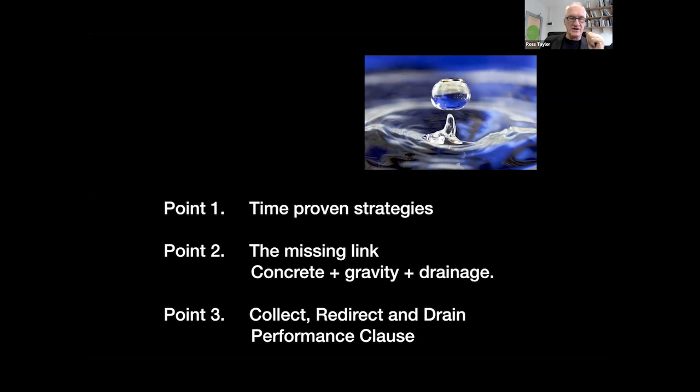So to begin with, time-proven strategies. We thought, how can you argue with the Romans and what they gave us? What did the Romans give us? Well, they gave us concrete, although there is some thought that in fact the Romans pinched it off the Greeks, who pinched it off the Turks, who pinched it off the Phoenicians. But we won't go there.

But I think we could all agree that, especially addressing a group of architects, we can start off with the Pantheon in Rome—we're on safe ground here. It remains the biggest unreinforced concrete dome in the world, 43 metres wide, with a lovely oculus at the top. And of course, this arrangement has been pinched by lots of people ever since, including our own War Memorial in Hyde Park in Sydney, and also the new War Memorial in Canberra, in terms of the oculus, not in terms of diameter.

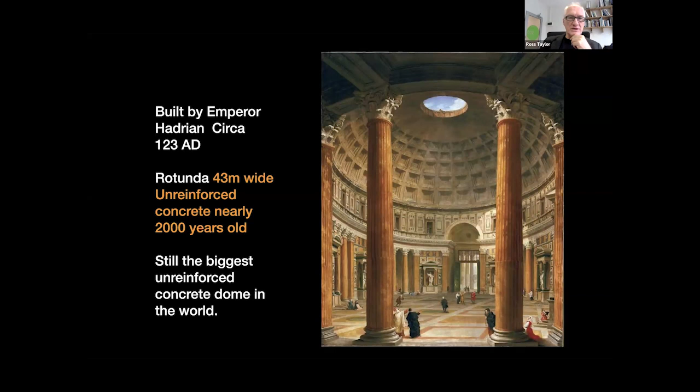This is nearly 2,000 years old. It's holding up well. Unless a developer gets permission to redevelop it, it should last another 2,000 years.

Of course, it's based on writings that Vitruvius was—of course you architects are all familiar with this, you've studied it endlessly. But we're going to have a slightly different spin on how Vitruvius has influenced the BCA changes. He, of course, is pointing in this diagram across to a Greek temple—he pinched the ideas off Greece and said, here's some good ideas, let's put it in a book. And that's all we're doing here, is saying, here's some good ideas from Vitruvius, let's put it in the book.

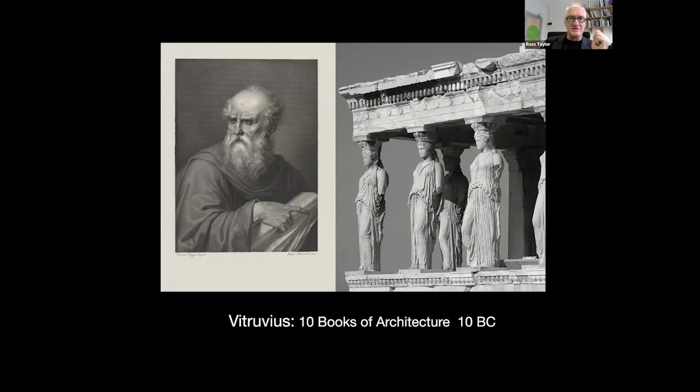So for those of you that maybe it's been a few years since you went to university, you'll know that chapter one is about floors, and it starts with concrete flooring. For those less familiar with the book, down in the bottom right-hand corner... do I show? No, I haven't got a buzzer. Is there a highlighter?

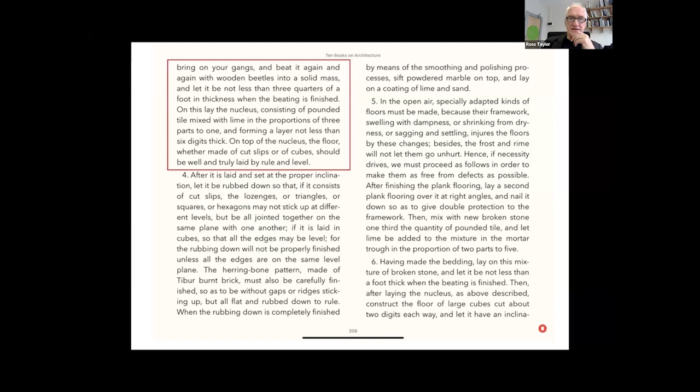But what he basically says is that when you're laying a floor, you'll cut falls 2 digits each way and let it have an inclination of 2 digits for every 10 feet. You can see in the top left-hand corner, which roughly equates to 1 in 80—it's actually 1 in 79, and we pinched that.

We thought we wouldn't use 1 in 79 for the NCC, we will use 1 in 80. He then goes on in number 7 there as to how to put a membrane on the top of that.

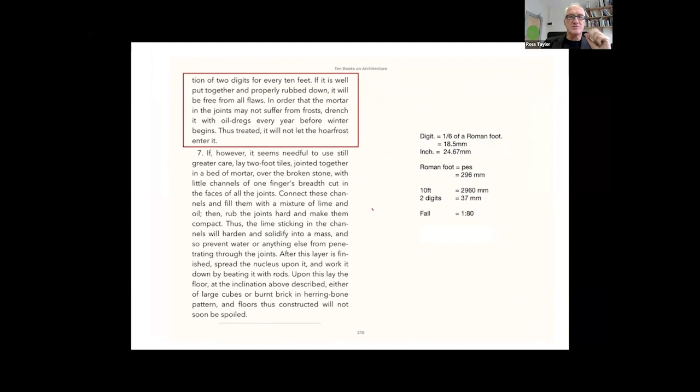So it's all about getting the falls below the membrane, not on top of it, which is so commonly the case. And of course, like many of you, you would have heard a builder say, no, I can't get 1 in 80 falls, it's too hard. We just highlight that the Romans were able to get 1 in 3,000 falls for the aqueducts.

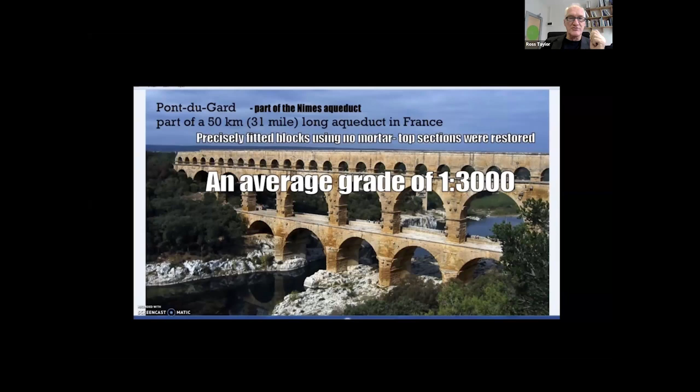So for every structural engineer that says, no, we can't draw sloping lines, we can only draw straight lines, we say, yes, well, this was done by hand, but we need to bring that back to the industry.

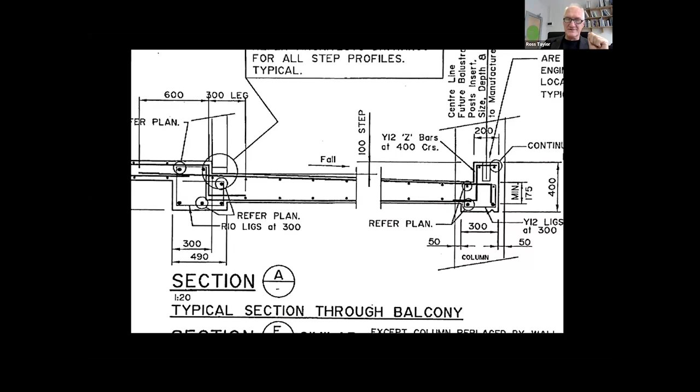What we're trying to really emphasize is the two things that have worked well in managing water on the outside of the building. One is a brick veneer wall, which first emerged in the 1930s. It's been a very successful system based on drainage system thinking rather than perfect barrier thinking, which is just putting a plastic bag on the outside of the building. Many of you will be familiar with the terrible problems they had in Canada and New Zealand, which came from trapping moisture inside the structure rather than allowing the water in, capturing it, redirecting it, and draining it. So a screen, a cavity, a drainage plane works well in the vertical.

The fundamental concept here is, it works so well in high rise. Where has it gone wrong that we have so many flat bits that don't work? The physics of water and gravity have been understood for millennia, but that understanding was lost for the flat bits. In my remedial work, we constantly come back to major university buildings—not just blocks of flats in the outer western suburbs—where the verticals are okay, but all the flat bits, the podiums, the balconies, and the basements leak. So the facade drain system thinking has worked exceptionally well across the industry.

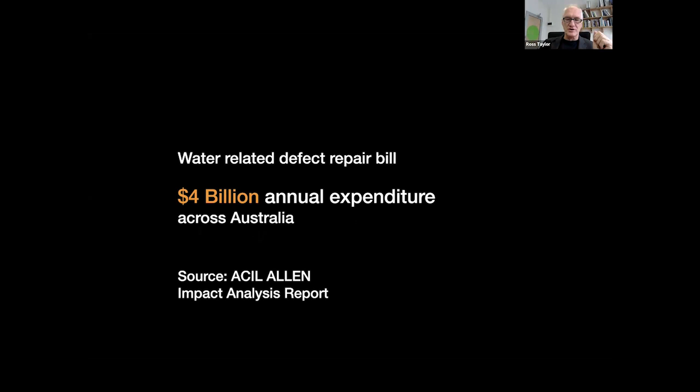Now, some would say that's how much was spent on lawyers, but I don't think that's true. It's also spent on an awful lot of jackhammering up of tiles and pavements across Australia. But one of the things from my experience in 30 or 40 years in this is that 90% of these leaks are from what we could call subsurface water—water that seeps into the substrate, does its little tricks, runs along, and comes out somewhere further along. That's subsurface water, as opposed to water that just runs along in view on the top of the surface.

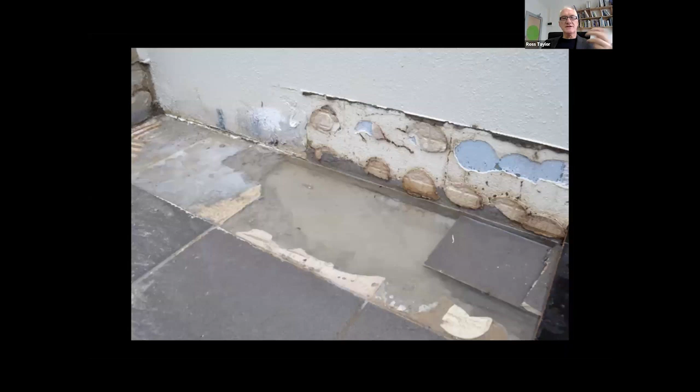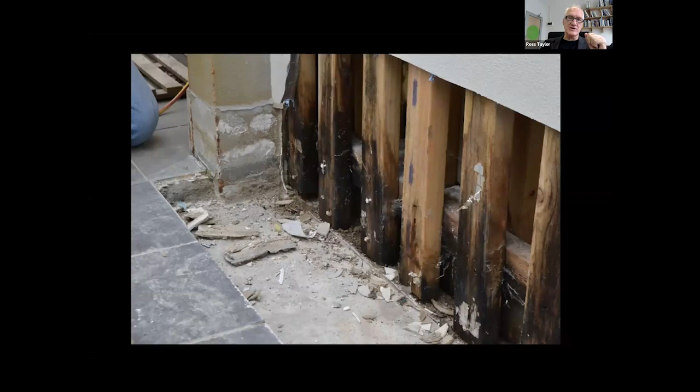This is where we see the pain occurring in so many units. The water that seeps into the structure can't get out, and drains in instead of draining away. This is the familiar pattern—blue board on the right-hand side there.

Michael, do we have a highlighter we could use? I wonder—there's the device. Anyway, maybe we can't, I don't know if I can. Ruth, can we do that, do you think? I can't see that on the screen. But I don't have anything on my screen.

With the blue, we've got water coming in through the blue board because it can't get out. Blue board's supposed to be a drainage system, but so often we block it. And then we have a flat slab with the membrane turning up to the outlet, and that's because of the disassociation in our industry between the shape of the concrete, where the membrane's placed, and the final finishes on the balcony.

So we go from this situation, which works, where the water drains clearly and freely to the outlet, to the previous situation where it's all jammed, and we basically have a permanent swimming pool holding the water. Now, it's not just cheap and nasty suburban building—the same concept has caused leaks at the Sydney Opera House forecourt for the last 30 years. The main building, of course, has good falls on it, so that doesn't have a problem. But all the flat bits have caused this.

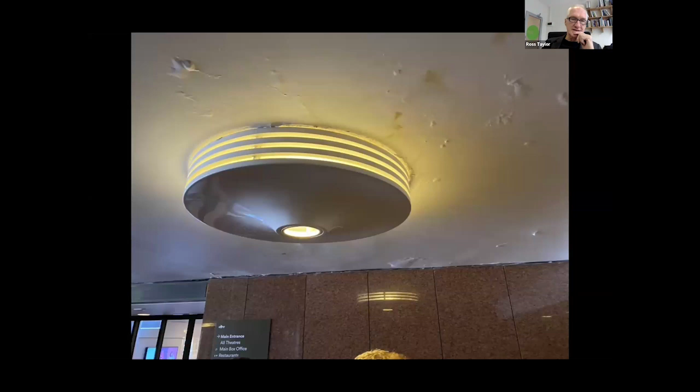So many of you that have spent a few hours down at the bar here would have recognised this in the ceiling. And of course, it's been repaired twice with the same old paradigm: let's hold the water forever because we've got a 20-year warranty on the membrane, we'll be okay—the thin black line, as we call it. But in fact, in this whole forecourt area, when we did the forensic analysis of the cause, we found the only drainage for that entire area is that linear drain on the left-hand side there. Any water getting down through the pavement underneath can't get out.

So it has to be stored by the membrane forever.

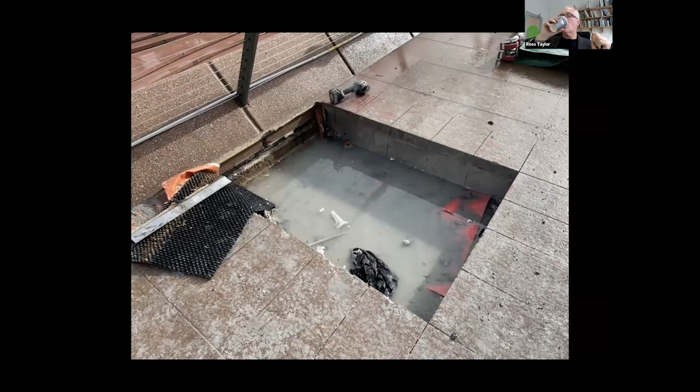And that's what gives rise to this: stored water down through multiple layers, and it's got plenty of time to cause mischief. That's when we have gravity working against us rather than for us.

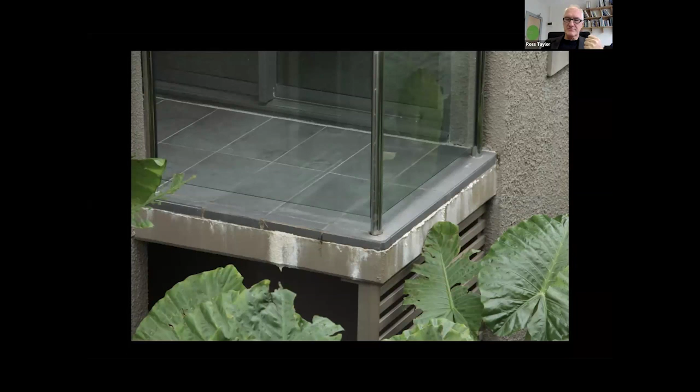And of course, every highway we go down, we see efflorescence where subsurface water is draining through, leaching minerals and causing damage.

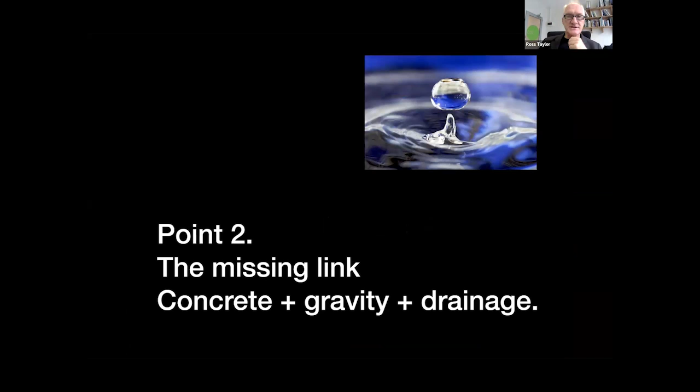So as part of the team, the Watershedding Community of Practice team, of which Craig and Michael are members, we had a look at the analysis of why it happens. And this is where we found this missing link: concrete, gravity, and drainage.

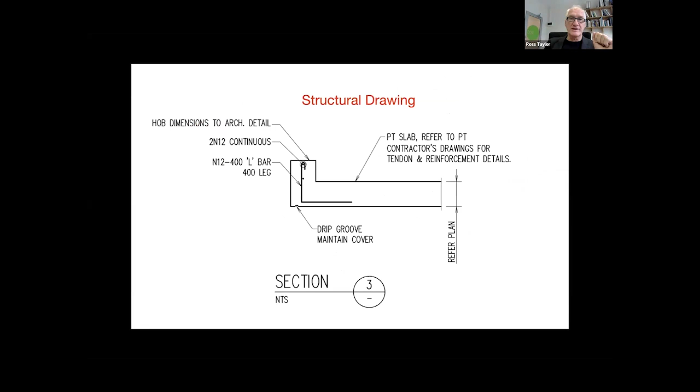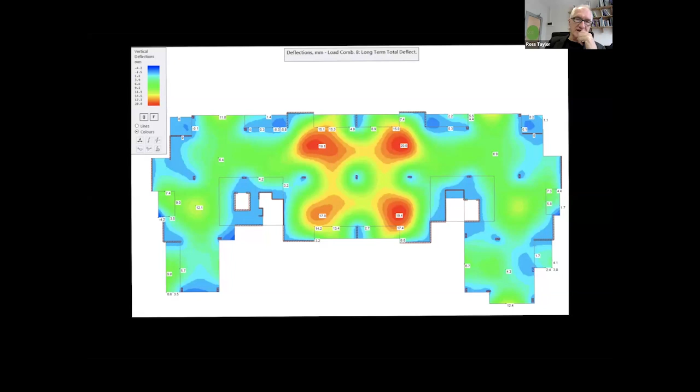Then, of course, as Michael's going to show in a few minutes, in 10 years' time, you then have hogging and sagging of the balcony. And what we commonly find when we come back to these buildings is that the outlets are often at the highest point of the roof, because the downpipes have been put in a column and it's been deflected away from the column.

What it really says - and this is not just the people in this room, it's right across the industry - is: look, I know waterproofing is a point of litigation, there's a lot of leaks, surely it's somebody else's problem, I'll just put it on the drawing, it's somebody else's problem, I won't actually try and integrate it into my design.

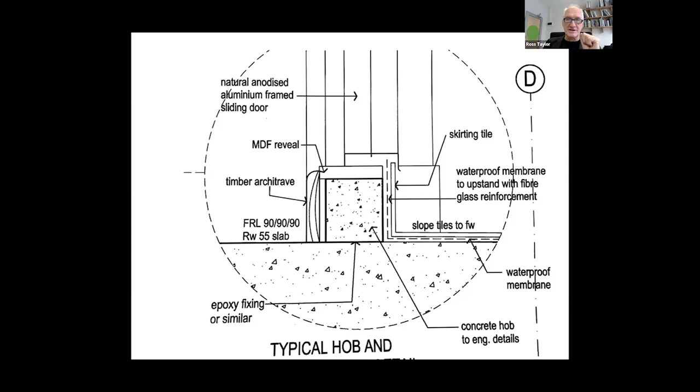So now it's slope tiles to floor waste, and that's what we end up with. That's the actual drawing for this roof. In other words, the water can't get away.

And even worse, the outlets, downpipes and branches are an afterthought. This is quite a famous and substantial plaza in the city, and the branch lines were poured on top of the concrete, which was flat and stored water. Or even this beautiful photo from Nat Press of an inspection by the Commission, where downpipes, when they're put in and thought about last, have to work in around the rest of the structure.

So this is what we end up with commonly across the industry. I have seen thousands of balconies that end up with this type of situation. It may look like a cartoon, but unfortunately it's painfully real. I've seen balconies two years old with 140 millimeters of sagging deflection.

PT cracking, pulling the guts out of the slab. Separate hob on the outside where water leaches through, water running away from the outlet, and the thin black line - or the red line in this case - of membrane turning up, and everybody hoping that their 20-year warranty they invested in is going to do the job. A flat slab right through, and water leaking in under the sliding door. That just happens commonly throughout Australia.

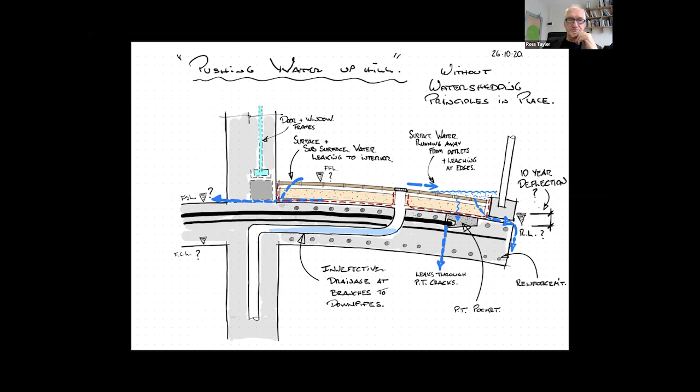One of the other reasons why this happens is that the BCA between 1988 and 2022 got its first changes, many from the Watershedding Community of Practice, the first tranche of changes. But between '88 and '22, there was almost no change. Part F1, in the 2022 version, actually only referred to surface water management, rising damp and external waterproofing.

In the section on external waterproofing, because surface water refers to water landing on the site, when we looked at the definition of site and surface water, we found that site is not the actual building. So the whole of Part F1 doesn't cover any of the building above ground. Then it had an exclusion for Class 7 buildings like car parks below ground. So in many Class 2 buildings with car parks down below, this section of the BCA didn't cover any of the building above the ground and none of the building below ground. We thought this wasn't helpful because the leaks are not happening at ground level.

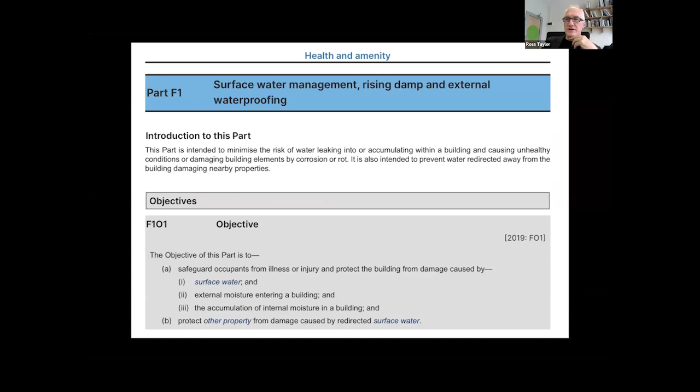So we came up with the crazy notion of calling water, water. Instead of just surface water resulting from storm... what we've done is redefine water as including surface water, subsurface water, rainwater, stormwater, rising damp - it's just now called water. So we don't have that exclusion problem.

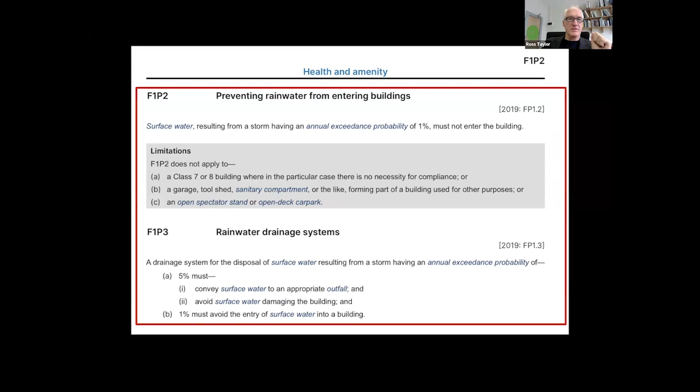Now, similarly, we had the problem previously that roof and wall cladding said it wants to stop water entering the building. Down here in the objective, you can see: safeguard occupants from damage caused by ingress of water from outside the building. And in fact, the old performance clause said a roof and external wall must prevent the penetration of water.

That's completely counter to the idea of drain system thinking, which is to allow the water in through the element, the bulk of it being deflected off the face, but some will come in because it's too hard to keep it all out in one go. But when it comes in, we then collect it and redirect it out of danger. So the performance clause here is the very opposite of what has worked best in the building industry - drain system thinking for facades, cavity walls, and pavers on support pads, which Mirvac have been using for 30 years successfully.

Technically, because the building is defined as the outer element, you might not know it, but cavity brick wall or brick veneer wall has been non-compliant to the BCA for the last 30 or 40 years. And you should have had a performance clause for the use of it. You might be interested to know.

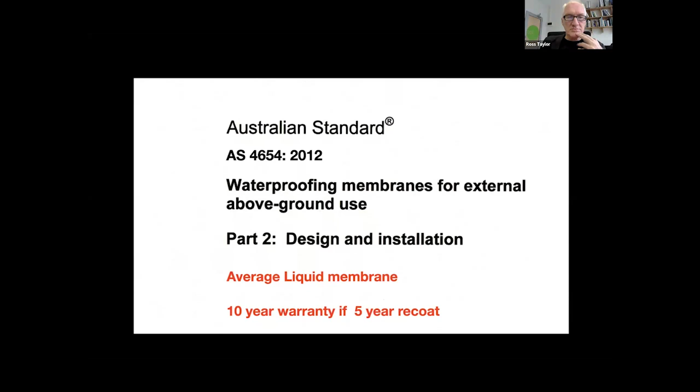At the moment, it refers to - and Craig's going to go over this in more detail in terms of the deemed to satisfy clauses - but what it makes reference across to is the use of membranes, which is the only reference to how to manage water, except for stormwater. But the average liquid membrane, if you get a 10-year warranty, you've got to recoat it every 5 years. And yet, as Michael's going to explain in a moment, in AS 3600, concrete structures have got to have a design life of 50 years, with 100 years for monumental structures.

So that's the huge anomaly in our industry. We put a 5-year membrane down on concrete that's supposed to have a design life of 50 years, and as the Romans have shown us, concrete can last 2,000 years. That's the huge disconnect. So now we need to bring back the connection of using the shape of the concrete in the horizontal or flat bits to behave more like drain system thinking.

And that gets us to point 3. The fundamental watershedding performance clause we've introduced is that of collecting, redirecting, and draining water as a way of overcoming the problems. So now F1, P1 - there's been a merger of 2 sections. We aren't touching the wet areas at the moment, that's for another day. It's now referred to as managing water impact on the building and adjoining properties.

So this clause on surface water is taken out and replaced instead with: water collected or concentrated by a building, associated site work or the allotment must be redirected to a drain system to prevent bad things. Water must be collected, redirected, and drained. And here we have the definition - water includes all of those things, so there's no arguing.

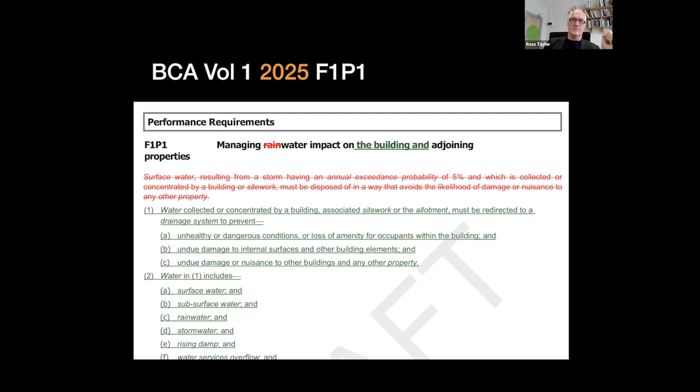Now, I can't tell you how much battle we had to actually get across the idea of calling water, water.

One key point I want to emphasize is the changes proposed here are just the beginning of shifting the way of looking at the whole issue of waterproofing and moving to a concept of watershedding, where there's integration of all the elements impacted by water into an integrated design that manages the water flow.

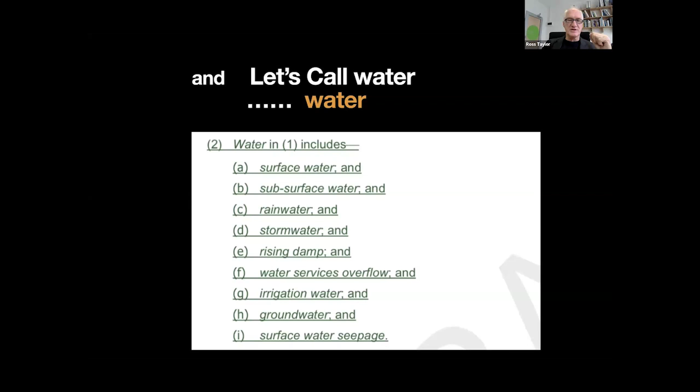Rather than stopping it, or just having a membrane with a 20-year warranty as the protection. That is where you guys come in. Architects are being put forward to be the coordinator of these things. They don't have to be the expert in each aspect, but their designs are to incorporate all of these elements, not least of which is how the structure behaves. And Michael will go into more detail.

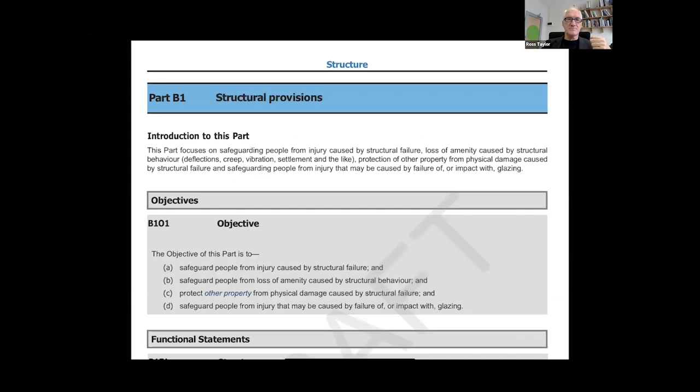For the first time, we're now linking in Part B, under individual actions, construction activity actions include expected 10-year deflection for the structural substrate in Part F1. The architect doesn't have to be the expert on each of these aspects, but like we included in the design and building practitioner regulations, the architect must bring this forward and put it on the drawing so that all of the other players helping to manage water are aware of the deflections, like you're required to have the 10-year expected movement in the movement joints.

This now has to be taken into account. So what we're trying to encourage is structural engineers to now see themselves not as, well, waterproofing is done by the membrane, but to have the structural engineer be the lead waterproofer, if you like, which scares the hell out of them. But if you like, they're the lead watershedder. Their shaping of the concrete, the provision for deflection, the provision for movement is essential to the rest of the team integrating their ideas onto the drawing drawn by the architect.

So that's it in essence. I'll just emphasize that for further detail, there are 2 courses that look at this new paradigm of how to manage water. They're both on the Construct New South Wales digital learning platform. One is called Waterproofing Design Principles, the other is Watershedding Design Principles for Below Ground, because we now have the exclusion of Class 7 car parks, or the ambiguity about that in the BCA, has been removed. Now basements, car parks, such structures have the same level of importance as the structure above the ground. So there's 2 courses we'd highly recommend you tackle and digest, both about 2.5 hours long.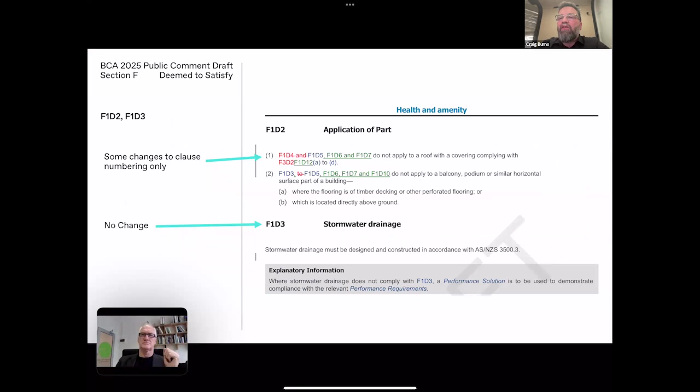This is really what we're aiming towards. This is kind of the outcome that the whole thing is aiming to get, a balcony which looks remarkably like the sketches that Ross produced there. I'm not going to go through it all in detail just now, but really we'll build up parts of it by looking through the clauses. If we start, F1D2, F1D3, minor changes just to numbering and things because all the numbering's changed again. Nothing to the stormwater drainage thing, and the real meat starts to happen at F1D4.

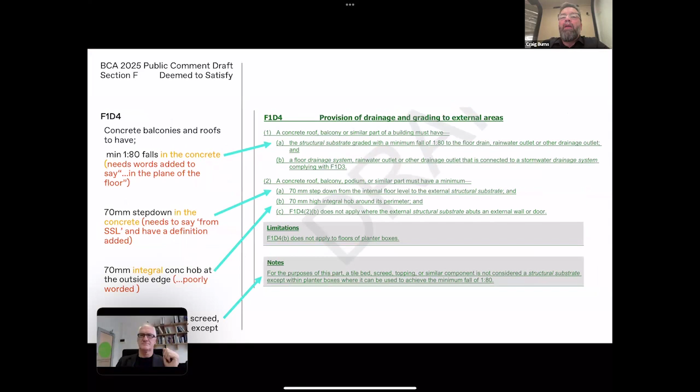So basically it's saying that you have to have a minimum 1 in 80 falls in the concrete in your balcony, your roof, whatever, podiums, but typically we're mostly looking at balconies as the main one that causes most of the problems for these things at the moment. But anyway, so 1 in 80 falls in the concrete, and that's in the concrete, not on the tiles on top, but in the concrete.

I think we need to advise that there's some words have to be put in there to say that that's in the plane of the floor, similar to what's in the internal wet areas part of it at the moment, because there's a huge level of confusion about where you actually measure a fall on a floor.

The next part is that there's a 70mm step down in the concrete at the balcony edge. So going from inside to outside, the 70mm step down. And again, that's in the concrete. We think that they have to change the wording to say that that's from the structural slab level and have a definition for what SSL is in there as well. But certainly that's the intent, is that it's a 70mm step down in the concrete.

Next part is there's also a 70mm integral hob at the outside edge of the balcony. So not where there's an external wall sitting on it, but at the outside edge. Again, I don't think the wording in that is particularly good. It ultimately says what it has to say, but I think it's poorly worded.

But as I say, if you think through to Ross, Michael, and I, and a number of others who sit on the technical committee, while we're very heavily involved in pushing the ideas for this, every time we write something, then it goes away into a dark room with lawyers and other people who try to make it into the most confusing language they possibly can. So we're never always happy with some of the language that comes out of the wording, but the principles are good.

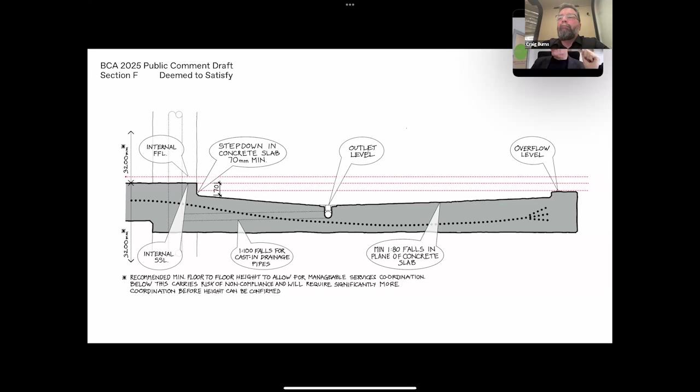We go to F1D5s, looking at substrate materials. This is saying balconies, podiums, and roofs have to have a structural substrate of concrete or FC sheet - so you can't have balconies with chipboard or ply or whatever as a deemed-to-satisfy solution.

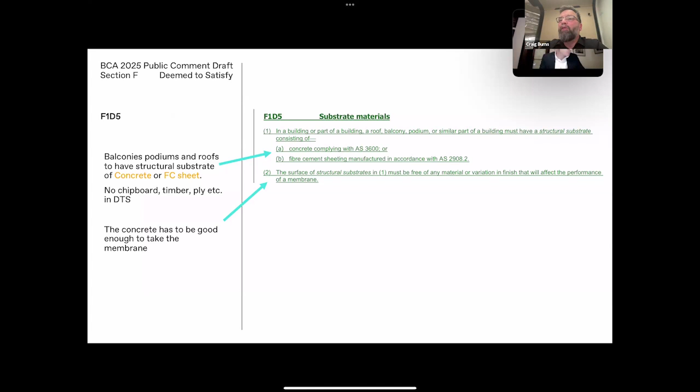Part 2 is saying the concrete has to be good enough to take the membrane, basically, which you'd think sounds fairly obvious, but that's not always the case - in fact it's frequently not. When the membrane supplier and installer turn up and the concrete's rubbish, they get told, well, do it anyway, or we'll get somebody else to do it.

F1D6, looking at exposed joints. Sections A and B have been added, basically saying that any joints in slabs exposed to water one way or another should be at the ridge line or a high point, which makes a certain amount of common sense.

Joints are always the weakest part of any building trying to keep water out - joints are where it always comes in. Other things as well, you get cracking and all sorts of stuff which Mike can go into, but really you've got to try and get joints in a reasonable position to begin with, so you stand a chance of keeping the water out.

Joints like this, we're saying, should have a hob poured integral with the slab, 50 mil for the length of those joints, so you've got a reasonable chance of keeping subsurface water from just going straight through the joint - because joints relying purely on membranes and sealants are doomed to failure.

Otherwise, anything below that, nothing really important happening - there's just some stuff moved around, but no substantive changes.

F1D7 is looking at membranes - basically saying in a concrete roof, the membrane must be applied to the concrete, not to a screed, not to topping, not to anything else. It's got to go onto the concrete, so your concrete's at a fall, the membrane's on the concrete, and it's going to a drain.

So again, it looks like this - it's the shape we had come up with before, but now your membrane is going on that. It's all fairly straightforward stuff - I don't think there's anything particularly contentious there, other than the fact that for years and years, people have been doing screeds to get the fall and then putting membranes on that.

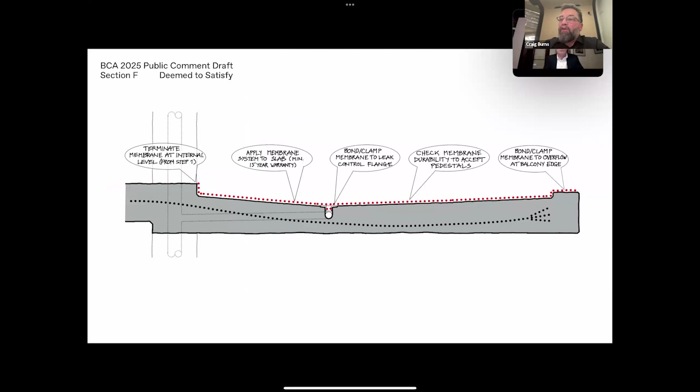And then wondering why the water keeps coming into the building, because you're putting the membrane in an incredibly vulnerable situation where the substrate it's on is going to crack. And once it cracks, the water's going to sit in something that doesn't have any fall in it.

Damp proofing requirements now apply to Class 7 and Class 8 buildings, which there was always an exemption for before. So most notably, in a lot of the cases when we're dealing with multi-res, that's looking at basement car parks. It also covers warehouses, factories, and laboratories, which surprisingly didn't have any requirement for any of this stuff before.

But basement car parks are now starting to be treated as a significant part of the building which you have to protect, particularly in multi-residential buildings. The basement car park is actually your front door. That's where most people end up arriving at these things. And in a lot of cases, we still treat them badly.

They're also an extension of your apartment, because most people now have storage and cages down in basements and car parks. If you're storing a bunch of your books and things in a cardboard box down in a steel cage in a damp environment, and then you bring it back up into your house, you're just bringing mold in with you. You spend lots of time and effort making sure your apartment is clean and dry and mold free, no condensation issues and all that, but now you're just bringing mold in because it was all sitting down in your basement anyway.

F1D10 is looking at surface finishes, saying that balconies should have self-draining floor finishes. That basically means things like pavers on pedestals, timber decking or whatever - something which allows the water hitting the surface you're walking on to drain through into a drainage plane down below. So it's that collect, redirect and drain thing that we keep putting together in drain system thinking.

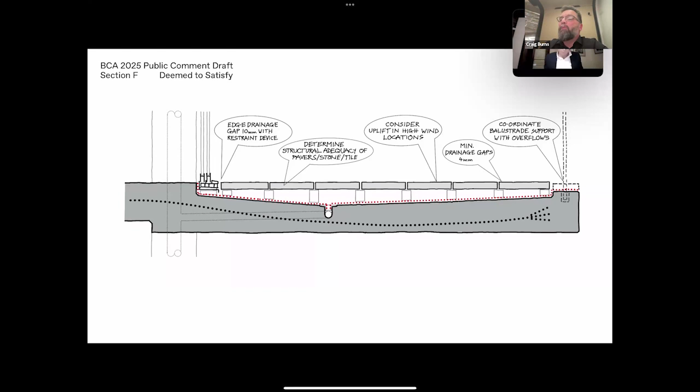And really, that ends up with the paving stuff on top. Some things to bear in mind with paving: looking at the structural adequacy of them, considering uplift in high wind locations, maintaining the minimum drainage gaps, coordinating with overflows so they don't block them. A key thing is keeping a 10 mil gap around the perimeter - our hydraulic engineers on the committee have been looking at making sure water doesn't sheet over the top in high wind situations and drive straight against your glazing systems. That 10 mil gap effectively allows that to drain well.

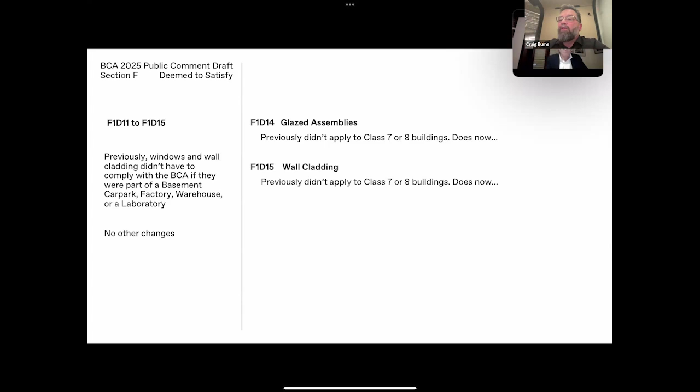Previously, window and wall cladding didn't have to comply with the BCA in basements, car parks, factories, warehouses, laboratories - again that Class 7 and Class 8 thing. So the only change is that exemption has been taken out. In our case, it's more to do with basement stuff - if there's glazed assemblies or wall claddings forming part of what you'd consider a basement, they still have to comply with the rest of the clauses, keeping water out, weather control done. Other than that, there aren't any deemed-to-satisfy changes beyond that. So that's basically everything that's there.

As part of the sketches we're trying to produce for what might be a handbook, we've got some examples showing how those might work in reality. This might be a situation where at your doors and windows, where the step down happens in the concrete at 70 mil, your finished floor is added above that. If you have a requirement from AS 4654 for your membrane termination height to be above 70 mil - say you've got a 120 mil requirement for your membrane termination - then that could be a 50 millimeter angle placed on top of the concrete internally. You wouldn't necessarily have to take the concrete up. It would be great to take the concrete up to 120, but sometimes that's pretty prohibitive.

So that's one way of doing it. You can have another situation where you may end up putting your glazing system and stuff on top of the slab. Again, might depend on whether you need level thresholds going out, either DDA access or you just want a nice clean level threshold. Then again, you probably want to drop it down. And other versions look at putting a double rebate in there, which is my personal favorite. I think it's the best of all worlds, but recognizing in a lot of situations it's not always the easiest

thing to form for the concreters. Then kind of elaborating on Ross's sketches earlier, what happens when you have walls meeting this thing is that you're basically taking a continuation of the drained system thinking, collecting and redirecting drainage that things like cavity walls and rain screen cladding systems have, and carrying that through into the floor as well.

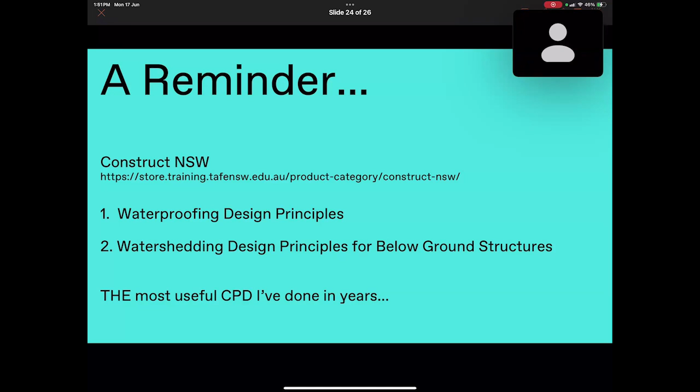Might just circumvent it. I guess when I look at your diagram and when I look at these adjustments, I'm interpreting that the set down is to the actual finished slab level, and then we've got a build up above. So I might end up, if I want level thresholds, with, say, 120 mil, who knows, something like that. But what we're saying is no screeds anymore. And tell me if I'm interpreting wrong, but no screeds, everything goes on the integral falls, and we're building up from that.

So what happens in a refurbishment, and look, you may not be able to answer this, but are we saying now that if I'm working in an existing context where there's not enough integral falls, what do I do? Do I do performance solutions, or what's the NCC asking me to do?

It's an interesting one, and this was a large part of the conversation at the conference we were at on Friday, dealing with this issue with a lot of remedial builders there talking about it. There's a number of answers to it. One is, yes, the performance solution option is always there. The real answer is for people like us who've started doing this, I must admit, to start doing some serious lobbying of the ABCB to try and figure out how they're going to basically start dealing with remedial situations. One of the decisions that we made very early on in the piece was that we're not going to water down how we build new buildings in order to make it easy to fix bad old buildings.

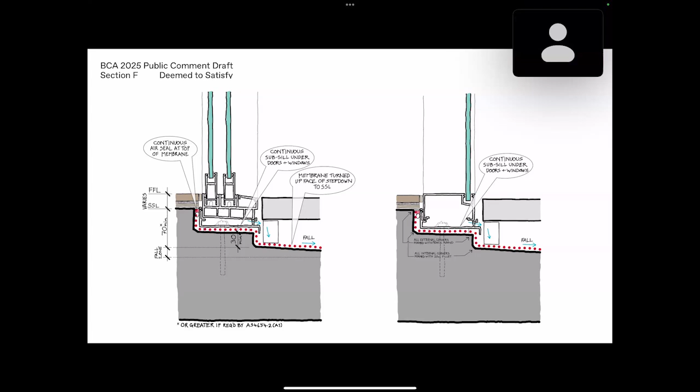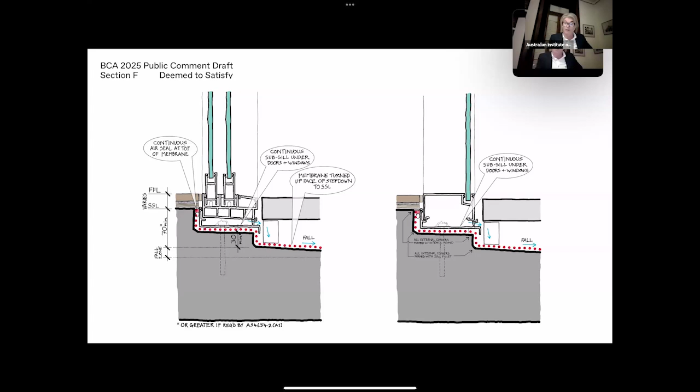Sorry Ross, are you going to be brief? Yeah, then we better move on, because I'd like Michael to have his chance to speak as well, and then we'll come back and finish up the Q&A. Come on, yes Michael, let's go.

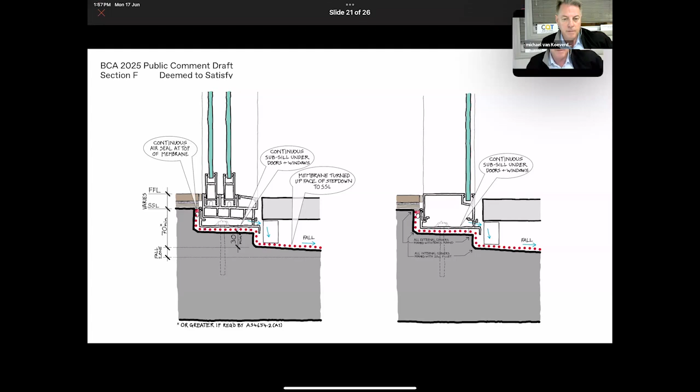Hopefully you can see my screen okay. Craig, can you see that okay? Yes, we can. Getting there? Yes, you can. Okay excellent, thank you for that. Apologies, I've got three screens running so I'm looking to the side, but I'm really wanting to look to you—it's a setup with my camera, so if you can look past that, we're all happy.

So I want to talk about the engineer's role in preventing leaks in buildings. Ross talked a little bit about it before, and there's a big difference we have to recognise: membranes for a long time have been seen as waterproofing, or a way of waterproofing buildings, and the structural engineer's job has been to make sure loads are transferred through the structure to the ground to meet a certain design life. So because there's a disconnect there, we expect the membranes to fail.

What happens, as we've talked about today, is that when water occurs, the building needs to drain. It's pretty simple. Membranes last 10 to 15 years, but the structure itself is meant to last 50 years plus or minus 20%. So there is a disconnect. At some point in the life of the structure, the membranes will either have to be repaired, or there's going to be some sort of refurbishment to deal with this water. So that has to be built into the design going forward, the fact that we may need to maintain this over time.

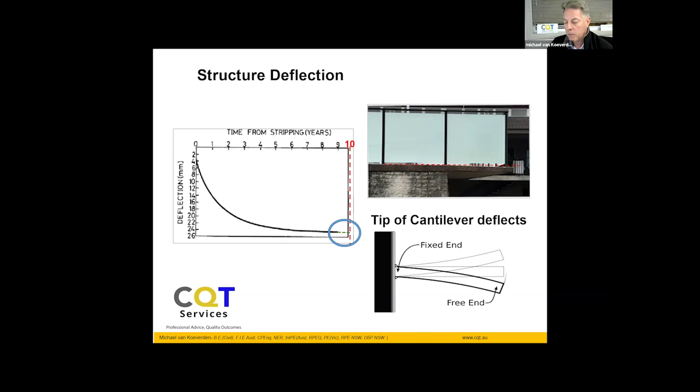So it's a matter of understanding what the building is going to do over time and how we respond to that for the loading. The other one is creep, which is a reduction in stiffness. As the building gets older under the action of gravity, which is trying to pull it to the centre of the earth, you get structures that respond very poorly to creep.

Ross's point earlier is really valid about thin, flat slabs, which some people believe are cheap. What happens with those is they're very susceptible to movement. So we need to start thinking about how we design our buildings so they're not moving around too much and causing us issues.

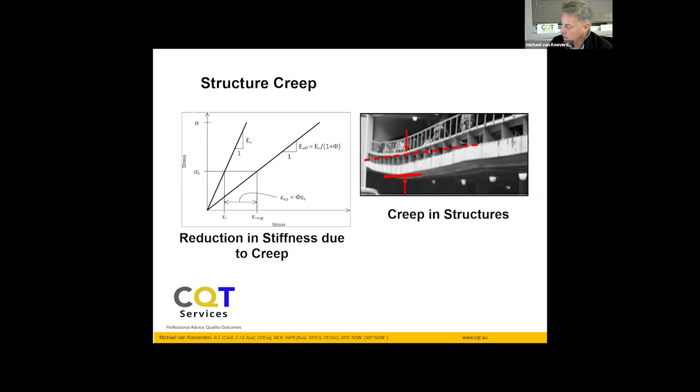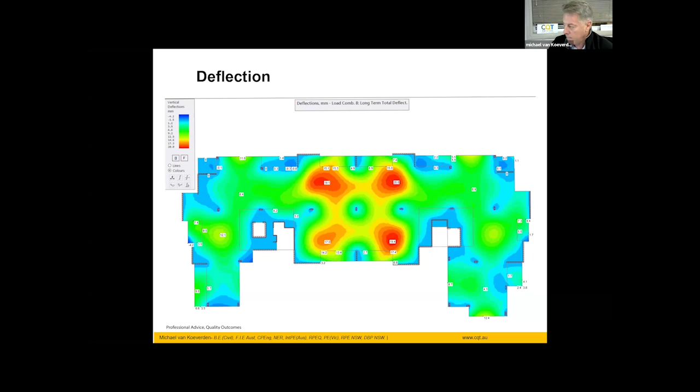We've got 1 in 80 falls, but we want those 1 in 80 falls for a long period of time, not just for the first 10 years. So we need to understand there's a recognition of the structure to perform a primary role of waterproofing. As Ross said earlier: collection, redirection, and drainage. It's very much about the structure doing the heavy lifting in that relationship.

One of the things I raised, and Craig raised it before, is that it's important for architects and engineers to understand the proposed column layout in a building, to assist in the design and its impact on drainage outlet layout. Because if we're putting all our outlets at columns, what's going to happen between the columns is it's going to want to deflect. So there needs to be a discussion up front between the engineer and architect to get a design that's compatible with the hydraulic requirements I'll talk about in a moment.

So between the columns, you get this deflection, which is the most likely place for drainage outlets to be located, but it has to work with the design intent from the architect and the input from the hydraulic engineer for the water that has to be dealt with. This is Craig's drawing, I've repeated it here because I wanted to reflect on it as a system.

It's an entire system. Sure, we traffic the pavers on support pads, but we really are relying on the structure to provide those integral falls, and I think that can't be understated. We need to recognise that we want good quality concrete, well placed, and I'll talk about that in a moment, that performs its function.

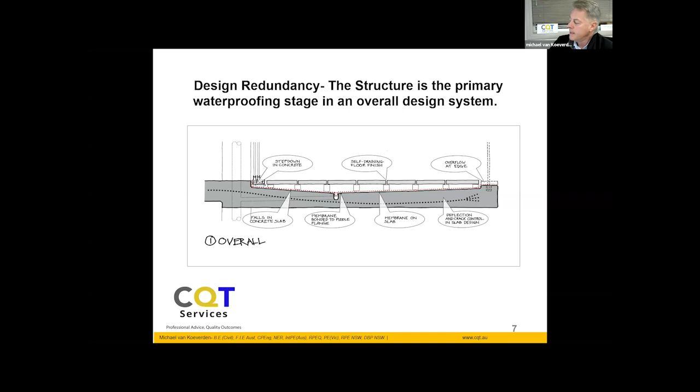So the membrane can fail, as it will, and that will allow us to still have a structure that drains, as Ross said, as the Romans did 2,000 plus years ago. I'll step into some detail now around some of that.

So if you've got a flat slab and you put a topping on it, what actually happens is you get differences in shrinkage between the structure itself and whatever you put on top of that. There's also a difference in stiffness, so they're going to respond differently to load because stiffness attracts load. You'll get the structure taking more load than the topping.

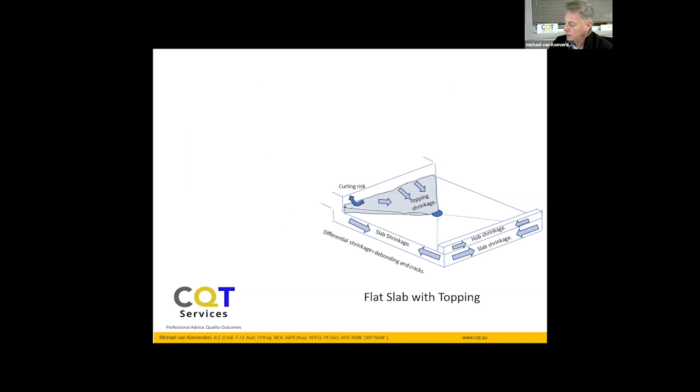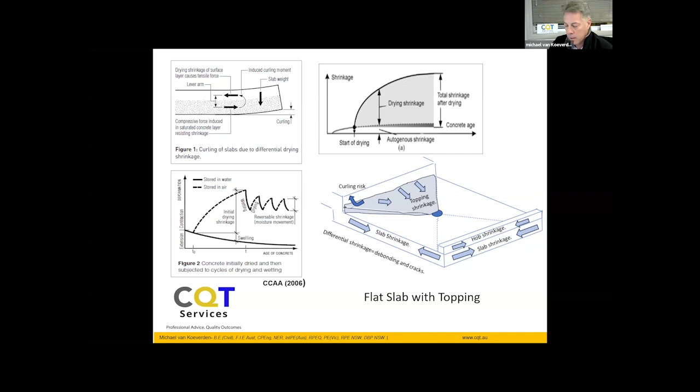It can also induce curling. We get shrinkage forces, and we get curling because of the thickness of the topping. And you get these wet, dry cycles that occur with concrete over time. So concrete will continue to shrink and swell for its entire life. It just becomes less and less, as you can see in the bottom drawing there. It starts to taper off, but it'll still continue.

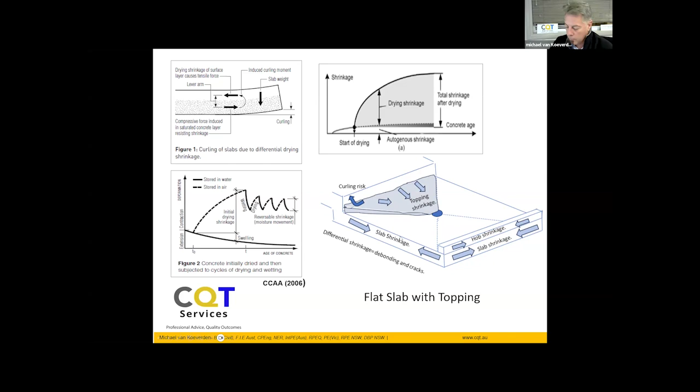So when you've got this differential, the topping is bound to fail over time, especially if the structure itself is also deflecting because it's flat. And it's simply because the topping has a difference in moisture top to bottom. Whether it's wetter on the bottom - where it's wet, it wants to swell, where it's dry, it wants to shrink - you get a difference. And it can either be upward curling or crowning, where you can lose the surface quite easily.

And again, I do a lot of legal work as well. I've had some legal cases on exactly this.

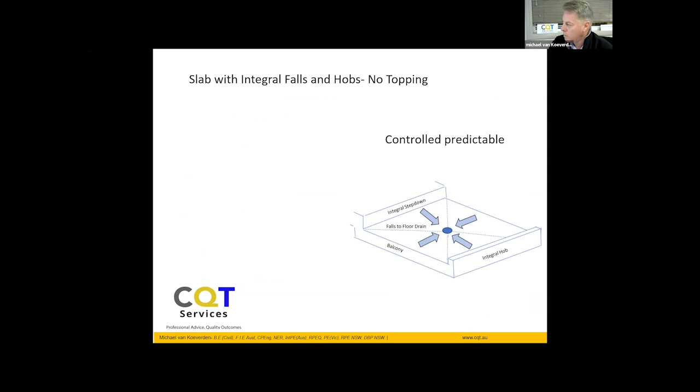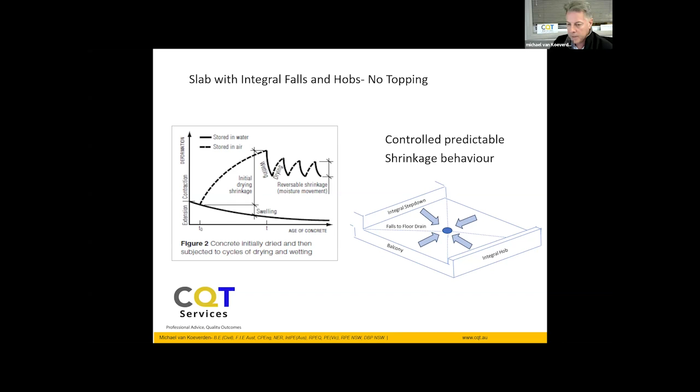So integral falls work better because you're getting a more controlled shrinkage profile through the section. You're not having this differential - you've got controlled, predictable shrinkage. You've got the same forces applying, but now you're dealing with it in a more holistic way. So it's a much better way to do what we want to do. And it ensures that this difference in moisture, stiffness, and deflection is accounted for, at least with respect to the topping.

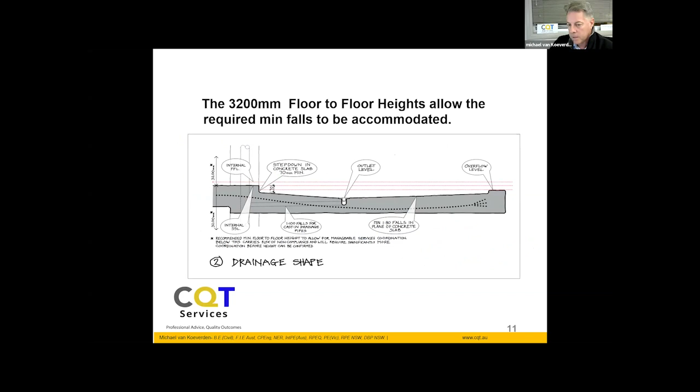The important thing Craig spoke about is floor heights - 3,200 - having enough there to do what we need to do. The step is a set down. I think one of the speakers, Kirby, spoke about that, Craig - it might be built up to 120. Well, in this case, 70 is a minimum, to give us, if you like, a catchment area, which I'll talk about later. Craig mentioned all these details, which I won't go into too much, but one of the big ones is the pipe location, so that we understand not only where it is, but what size it has to be to take away the water. That's a really important aspect I'll talk about in a moment.

Here's a build-up of that. So a developer will hopefully allow you enough floor-to-floor height to get 3,200 mil. You'll have your minimum 70 set down. You'll have an overflow level, Craig, which will set the reservoir, if you like, or your catchment - your water catchment area. You'll have a pipe location, which has been developed between the architect and the engineer to work on the best case scenario. So as Ross said, the low points are always the areas for drainage. You don't have drainage outlets in the high points. We then have a 1 in 100 fall to the pipe to make sure the water can get away.

And we have to size the pipe here to suit also the water that's above. I haven't drawn the pipe that comes from above, but you could be picking up units within a multi-unit facility. So the consideration needs to be done on the hydraulic engineer's component to that. This is really important, and it's recognition - I think Ross has talked a lot about this in the past - about the design pyramid, with the architect on top, the design engineer, and potentially hydraulic engineers, then builder below. But the architect's design intent should be carried through the entire design.

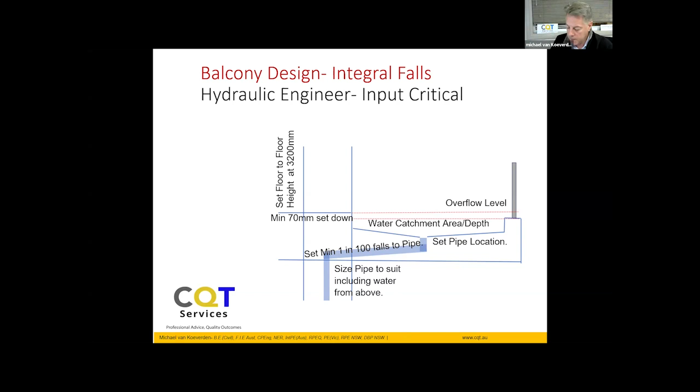No joints in balconies - I'll talk in a moment about post-tensioning - but no pans in the balconies, because as the concrete moves and swells and shrinks and deflects, these pans can open up and leak, and you end up with effectively a point of leakage through the balcony itself.

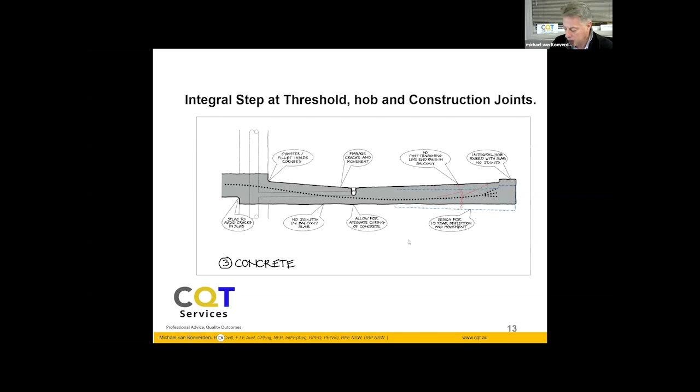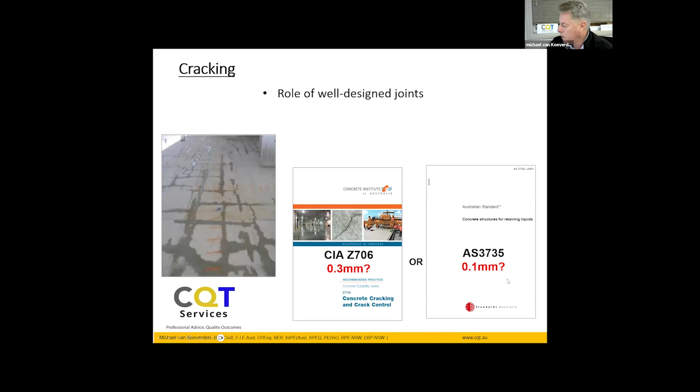The big question then becomes, what's the design of the joints? We want to have joints outside the balcony if possible. Sometimes we can't, but if we have to, we want them outside the balcony. And we want to have crack control. The question then is, do we make it a tank slab where we have a water retaining structure, or do we allow for some movement through controlled joints?

So as part of that is the unplanned stresses. I'll answer Kirby's question a bit later about if you've got an existing building and you want to retrofit, there are some things you can do. You can put control toppings on that will still help, but it's not a new and long-term solution. It's a solution, but it's not a long-term solution.

So let's talk about that. You can do things like add fibers to it, which I've done a lot of, and we can get into that discussion in question time. So the question is, what level of crack control do we need to obtain? That's a design decision by the structural engineer, working with the architect to get the detailing right.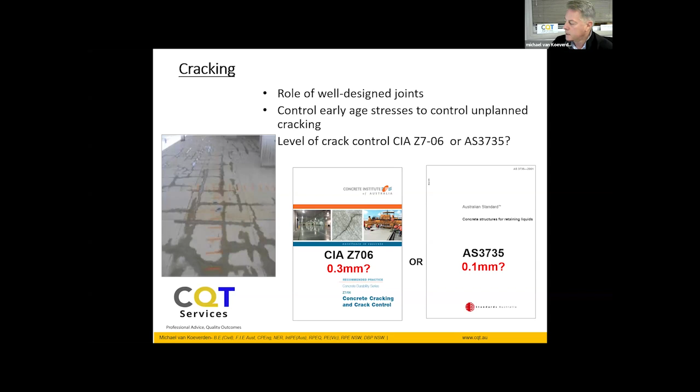So you might have post-tensioning, for example. We talked before about the live end in the unit, not in the balcony. End stressing, I know, is not architecturally ideal, but it is another way to get the pans out of the balcony. Things like CARES, a presentation I did recently, is really about understanding the way that your post-tensioning is being installed and the way that it's performing in practice. It's not just a line on a drawing, it actually has an implication on the structure.

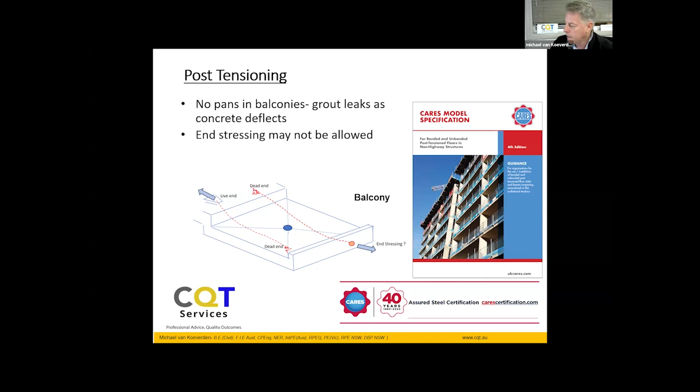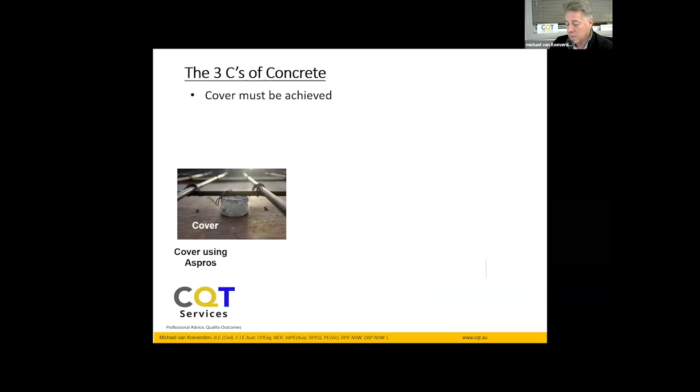There's obviously the 3 C's of concrete. Good cover, well compacted, and well cured is a really good starting point. Because now we're relying so heavily on the structure, we're recognising the role of the structure. We don't want unplanned cracks in there. And we can do that with good concrete practices.

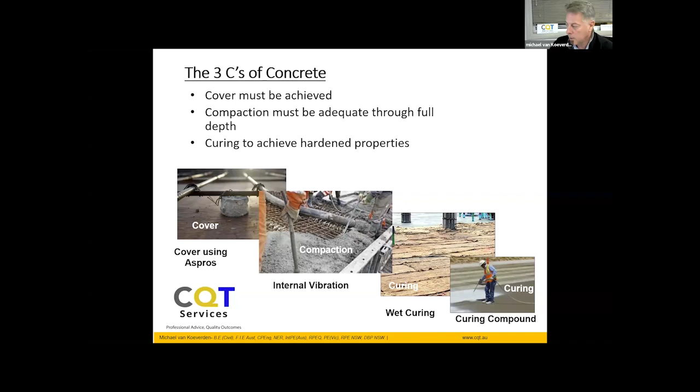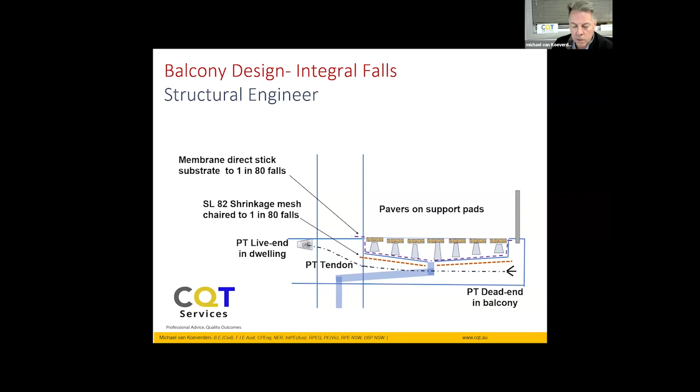So the membrane still has a role, and I see this as a redundancy in design. As engineers, we like redundancy. So if the primary system doesn't work, we've got a secondary, we've got a tertiary. The primary system is the structure. Let's get that right. We've got the membrane as a secondary system.

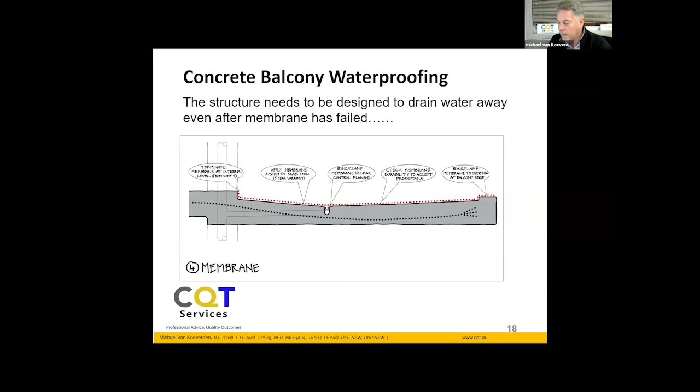And the upper layer of pavers will initially capture the water, slow the water down, and allow us to get better control of what it's doing. So the pavers themselves have to be structurally adequate. So there is a design phase, and the work we're doing with the Watershedding Committee of Practice talks about some of the structural testing of those pavers, so that we understand they'll be able to withstand the type of loading people would put on them in balcony applications or other applications.

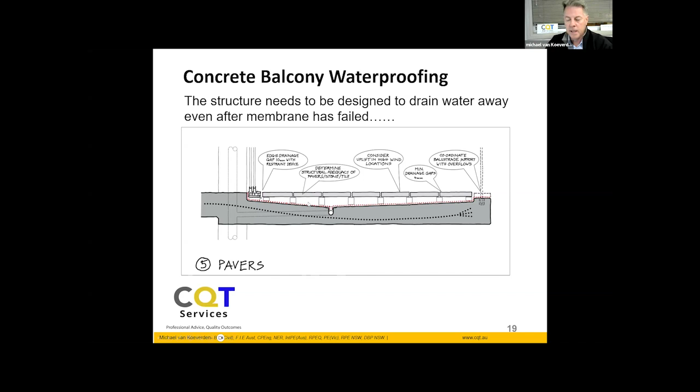And as Craig said, there's important things to deal with, like gaps at the edges and also in between, so people don't get their stiletto heels caught in there. But that's another discussion for another day.

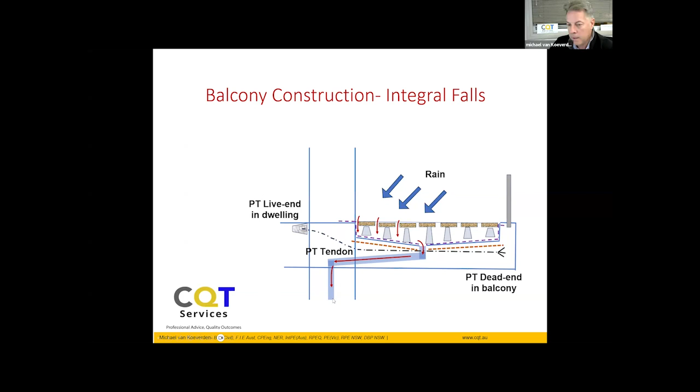So in terms of what the rain will do, it'll follow that path that we've created. We've got redundancy in design, a suitable platform, or wearing course, that's also disabled access friendly, because we can adjust these pods over time to maintain that slope. We have an overflow built in, so we're never going to overflow the structure, and we've sized our pipes appropriately through hydraulic design to make sure any water collected and redirected is adequately drained and dealt with, not spilling in other places.

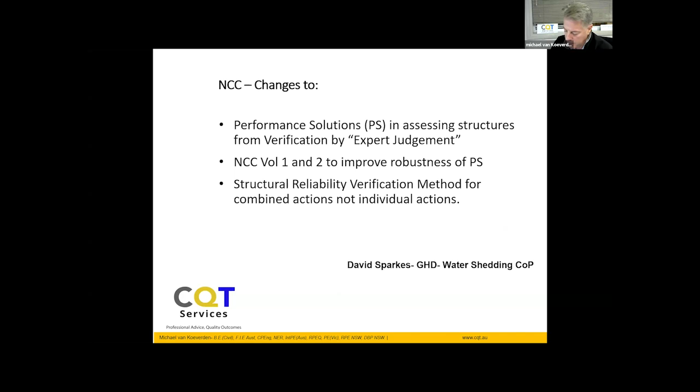So the changes to the NCC from a structural point of view, in the performance solutions for assessing structures, have moved away from verification by expert judgment, which was an allowance that expert structural engineers could make on a particular solution. The intention of the changes in volume 1 and 2 is to improve the robustness of performance solutions. The structural reliability verification methods for combined actions are now applied, not for individual actions. This is provided to me by a practicing structural engineer who's also part of our Water Shedding community of practice.

So what that means is there's a recognition of a system that doesn't rely solely on the individual to make an expert opinion on the suitability. I think that's a good thing moving forward.

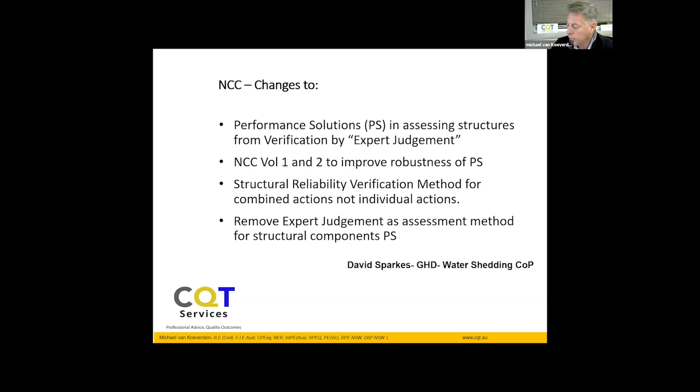So in 2022, the NCC was, from a structural perspective, qualitative with respect to the structural provisions. The proposed 2025 changes are more quantitative, and they rely on setting requirements for components made of new and novel materials to form construction. That encourages innovation, but also prevents practitioners from setting levels of public safety solely on their own discretion. So what this means is there's a recognition that there's a bigger picture here. We've got a reliability that we need to build into buildings by combined actions, by a more direct approach to the way we engage with buildings and the way that they've been constructed and built.

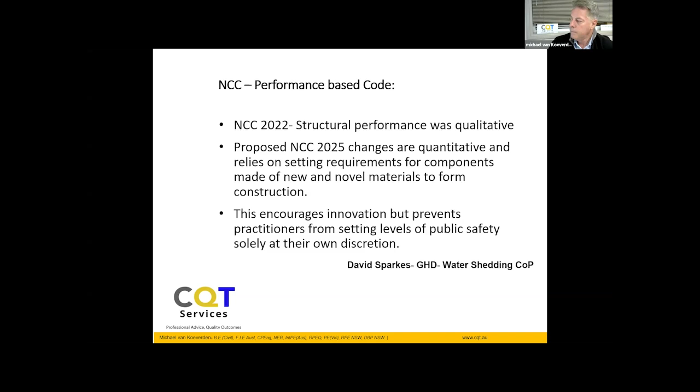So I've just put this, Craig, as a last slide, just to talk to the fact that obviously the changes are clear and they're on public record. So again, we all encourage you to give that feedback. It's really important to the work that we're trying to do.

The way I'd like to close, Craig, is to say I've never seen collaboration like this before at this level between the designer, the practitioner, the architect, the engineer, the waterproofer, in Ross's case the hydraulic engineer, and the builders. It's quite a unique position we find ourselves in. And I think that's why these provisions have been so successful in getting into the NCC, because they're needed. You've got to remember, people live in these units. They spend their last dollar getting into these units. The cost should not be on them to pay for any rectification. So I guess that's where I'd like to leave it. Thank you.

Thank you, Michael. That was great, and I like what you said about that collaboration. That's really great to hear.

Craig, have you got some remarks before we move on? We've got a couple of questions, and perhaps Kirby's got a few things extra she'd like to ask. But Craig, over to you. Kirby and I can catch up for a coffee as well for anything that.

Yeah, that's totally fine. Look, that's a terrific idea. You're welcome to join, Michael, if you want. Oh, look, I'd love to. I'd love to learn a lot more about it. Yep.

I think the only thing I'd say in closing was kind of what Michael was saying at the end there, that it's the process that it's gone through to get to this point is a product of integrated thinking. It's everybody in the design and construction team getting together. The community of practice that we work in has got concrete placers, formworkers, a whole series of different players, suppliers of membranes, QSs, it's got all of those things in it. And that's how we can get to what I think is a pretty robust solution to try and solve the problem, because don't underestimate how large a problem this is.